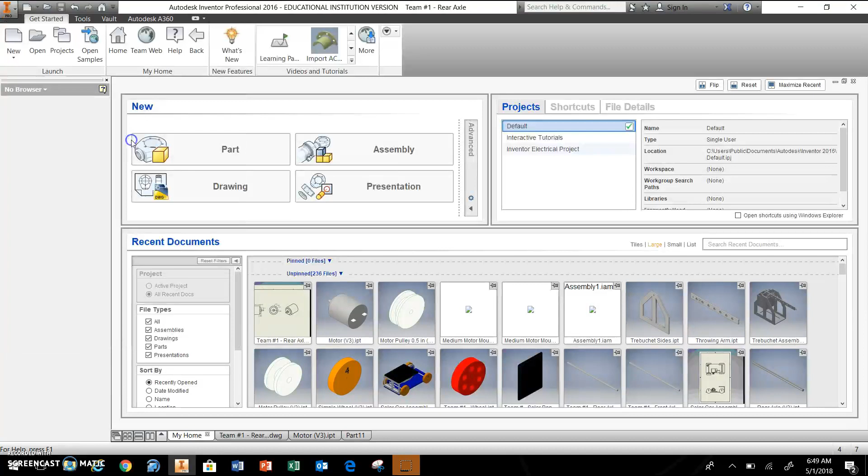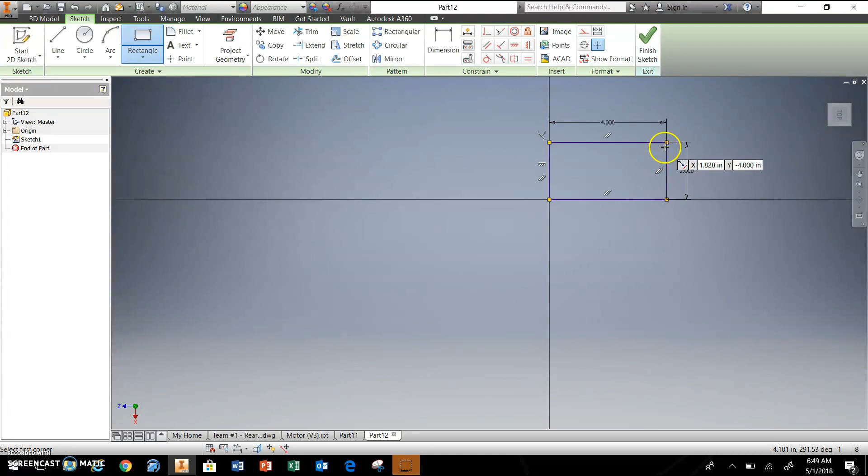You want to do a part, and I'm going to start with the very base of your car, potentially. And if your car's rectangular, you could just use a rectangle. And you can put the dimensions in right here, hit two, whatever it is, and then hit tab and put what the other dimension is. If you ever mess that up, you can just double click and change dimensions. You can also use this dimension tool too. It won't let me do that because I already put that dimension on there.

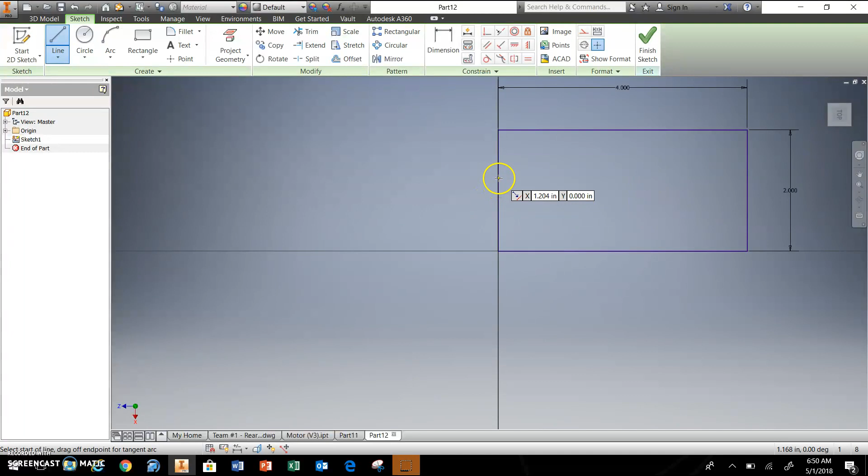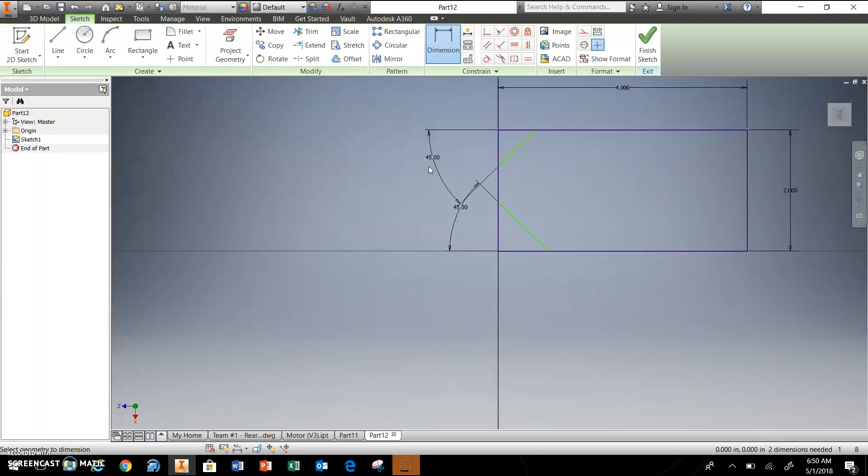If you have a different shape than this, like it's angled, you might want to use this line tool instead to trace it out. So maybe the front of your car is more like this potentially. But you'll want to measure these out and get the right angle on these. So to do angles, you just touch the two lines that it's between. So maybe you know that this is at a 45 and this is at a 45. Okay, and then you would want to do something like how far back is this too?

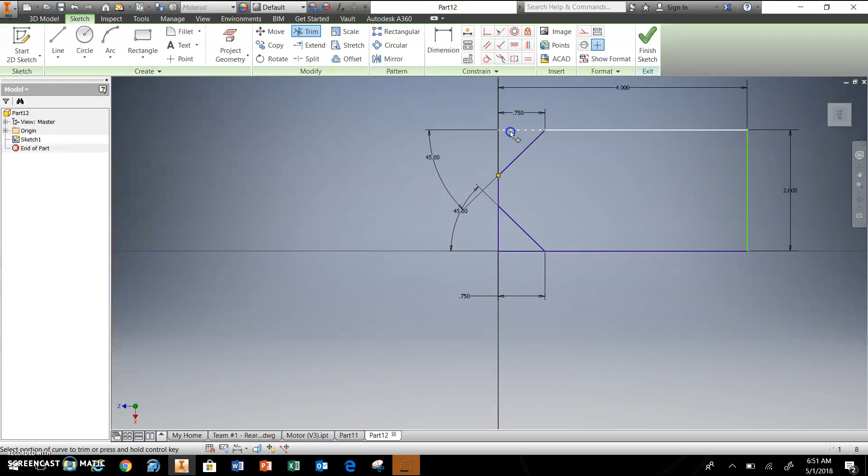So these are just some examples. Your car might not be anything like this. All right, and then you can trim away this. So you might want to do something like that, use the trim tool. So if your car has a weirder shape, just start with the line tool and trace out the shape, but make sure you're dimensioning things.

Any cutouts that you want to do, it's easiest if you do them right here, right now. You can go back and do those later, but almost everybody's going to have a slot for the motor mount to slide on. This, you definitely want it to be about 0.15. That is something you do want to copy right now. How far it is from the outside of the car, you need to measure that on your drawing. That's critical to get that right so that your motor pulley lines up well with the pulley on the rear axle, or front axle if you're doing front wheel drive.

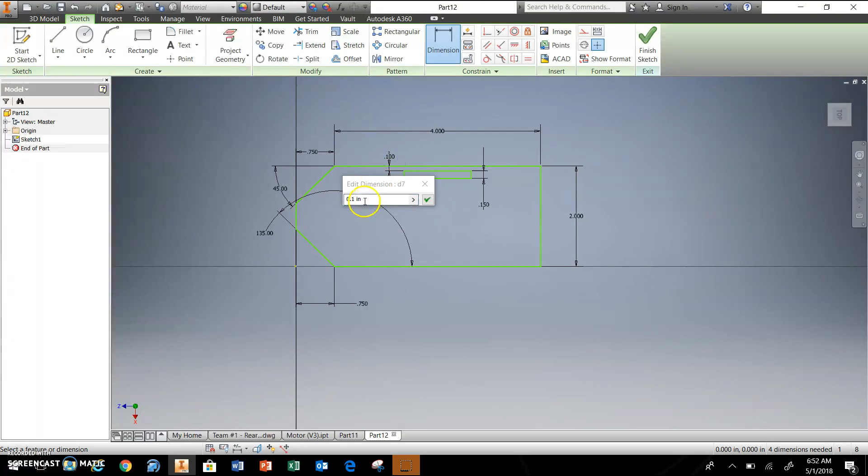So you might need to change this number. That looks probably way too close. Don't use 0.25 because I don't know if that's right. And then you also want to figure out the length of it too, however long you want to make it. Any other cuts that you want to make in here, it's best if you do it right at this time. It's easiest.

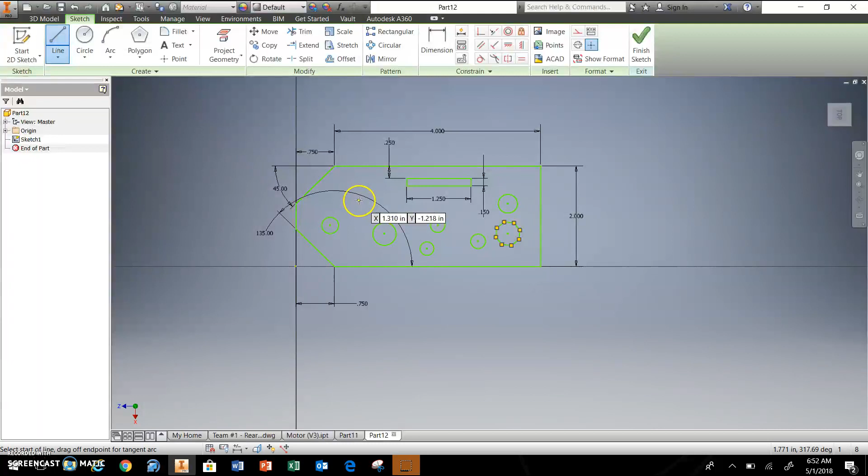Maybe you got a polka dot pattern kind of thing going on. I don't know, it's up to you. Maybe you want to do some polygon, for instance. That's kind of fun to do. And you can put how many sides the polygon is. So you can do an octagon. You could trace out whatever shape you wanted to put on here if you want to do something weird. So it's best if you do that right at this point because it ends up being less extrusions. It ends up being just one instead of having to do a bunch of cuts.

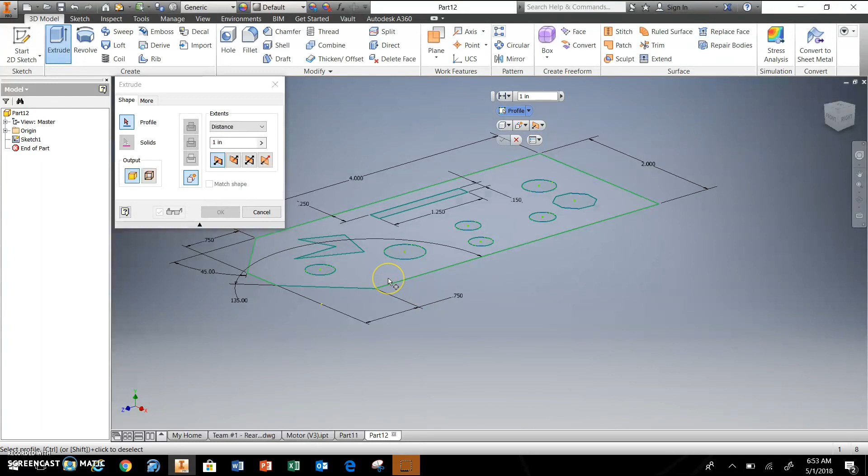Now, when you extrude this, you need to point out what you want to extrude because you have multiple shapes, so the computer doesn't know what you want to extrude. If you're having problems getting it to extrude, you might have an open shape, like where this line didn't meet that line. You can't have an open shape. So the thinnest you can do this is a 1/16. The most you can do it is an 1/8.

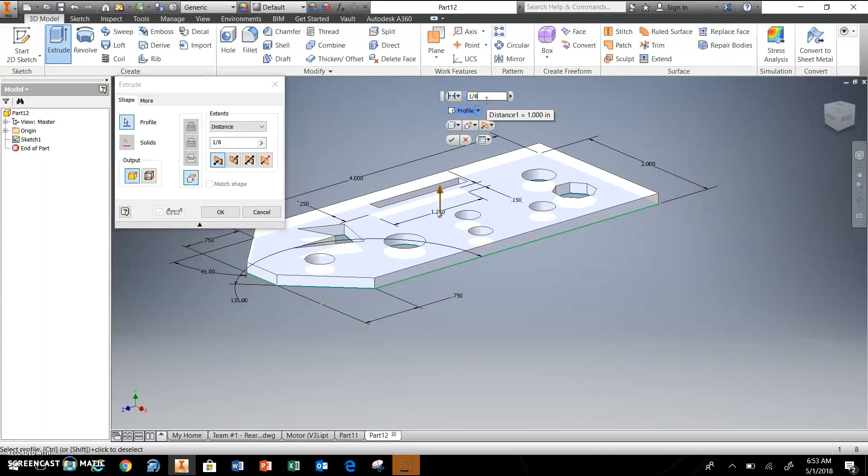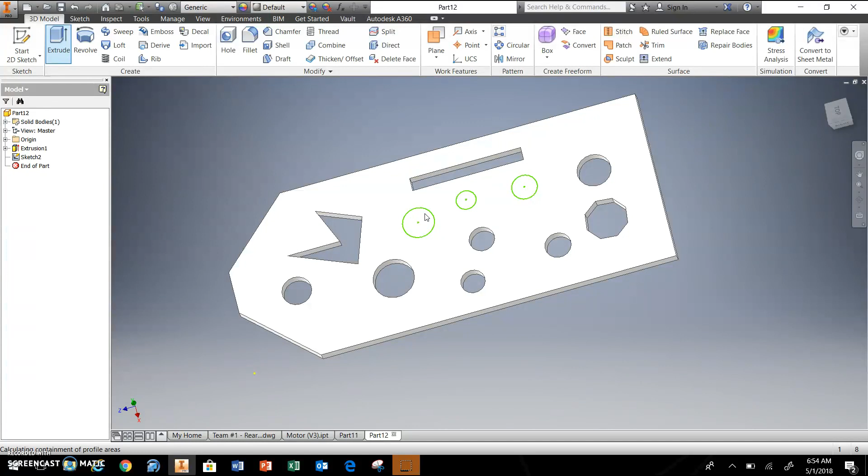Okay. And if you did want to go back and cut something into it at this point, you could go back and do a new sketch, or you could have done this instead of doing all these beforehand. And then remember, you're going to have to choose the shape that you want to extrude since there's multiple shapes. The computer doesn't know which one you want to extrude.

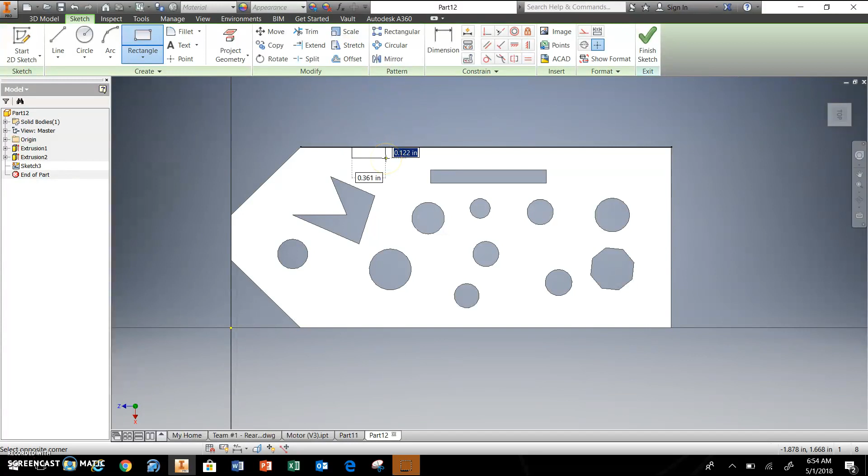Boom. Okay. One thing you guys will all have is the piece that comes up or goes down that your axle is going to go through. Now it's up to you to dimension these. Remember, you can use the dimension tool, you can dimension the thickness. You could have done this as you put them on there or do it after the fact like I did.

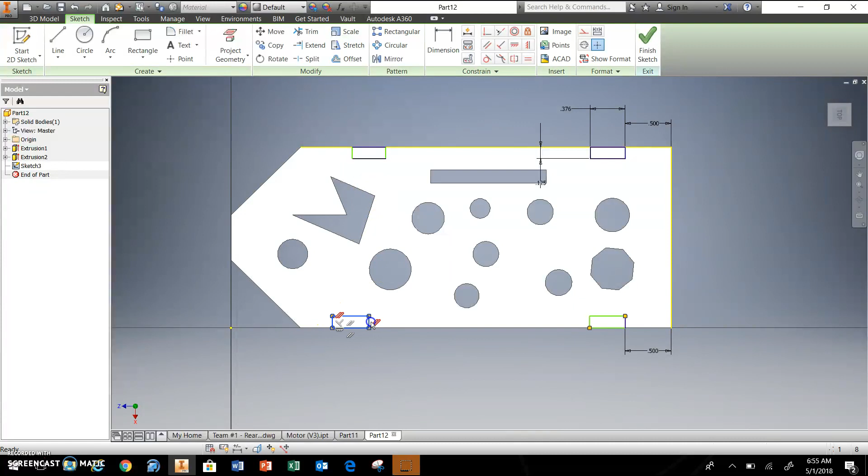You need to do how wide it is. I'm just going to do one of these. And these need to line up with each other. So make sure, for instance, down here when you do this one, everything's the same, and make sure this is definitely the same as that. Otherwise, things won't line up. Okay, can finish that.

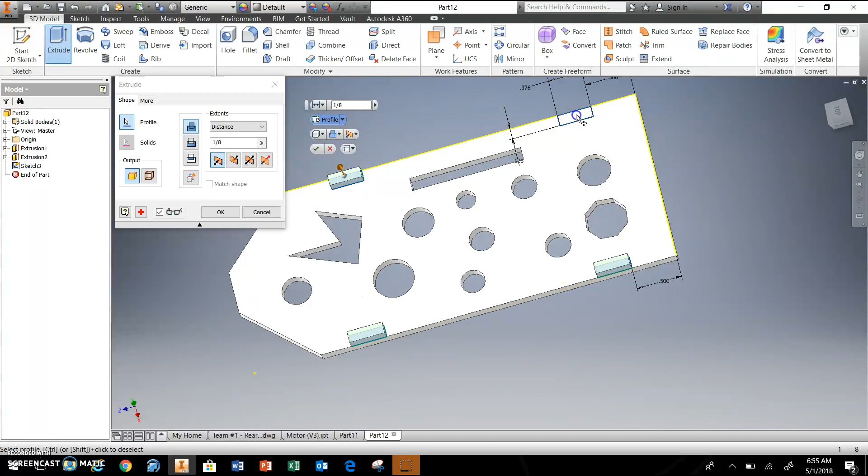Extrude these. So this is what your axle is going to go through, something like this. You could do a different shape than this too. You could also draw it from the side and extrude it inwards too. Yeah, that might be too much. Oh yeah, that's a lot. So don't do that much if I were you, unless that's what your hand sketch has.

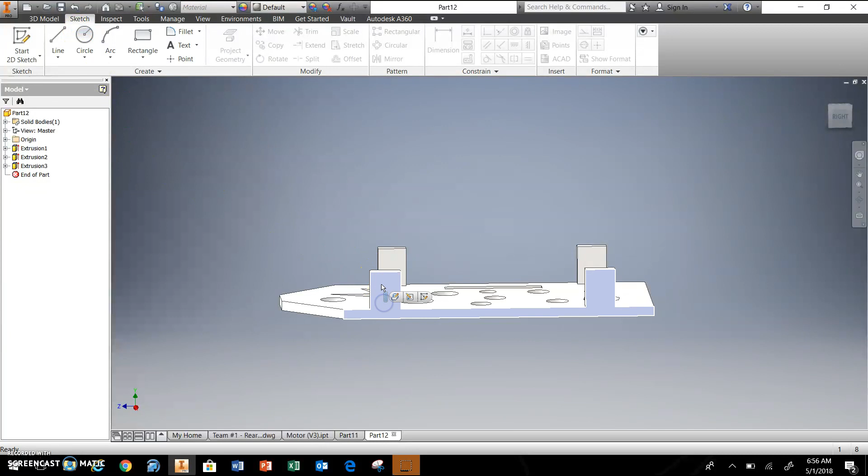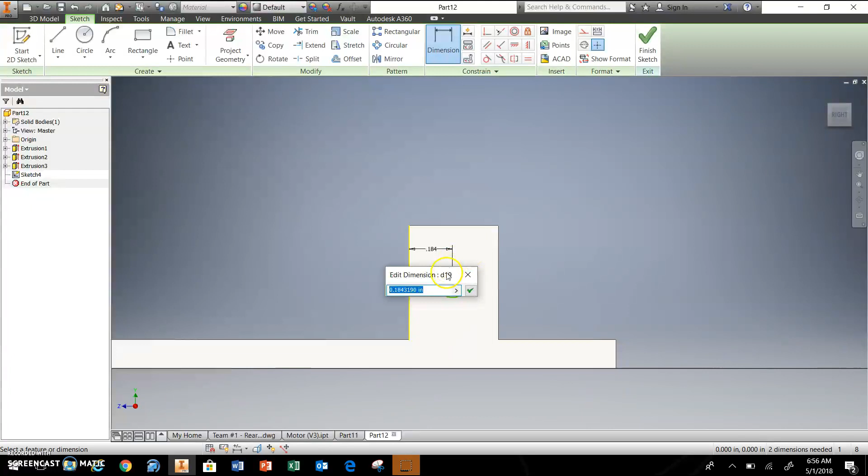And then you need to obviously make a hole for the axle. We could do this on just one side. And then make sure you put this in the center. Nope, didn't like that, huh? So whatever this overall width is, divide it by 2. And then make sure you figure out placement this way too. You would do the same thing on this one as well. I'm just going to show you one of these axle supports.

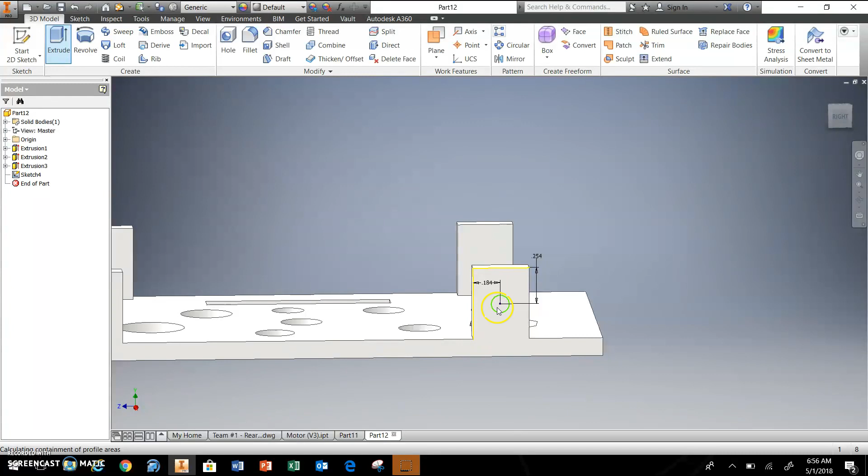And then what you want to do is extrude and do a cut. I don't know why this computer is so slow. A little frustrating. Cut, and then you want to pull it so it goes through both sides. Then you know it definitely lines up. And you'd want to do the same thing here. You probably could do that at the same time actually as you do the other one.

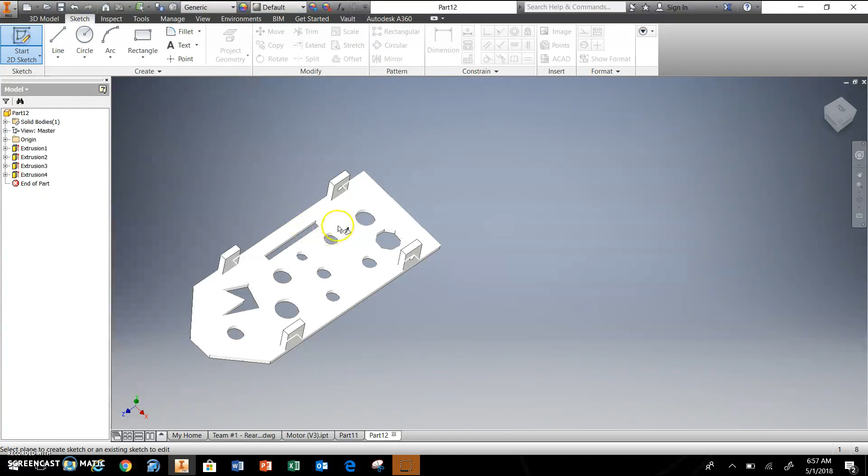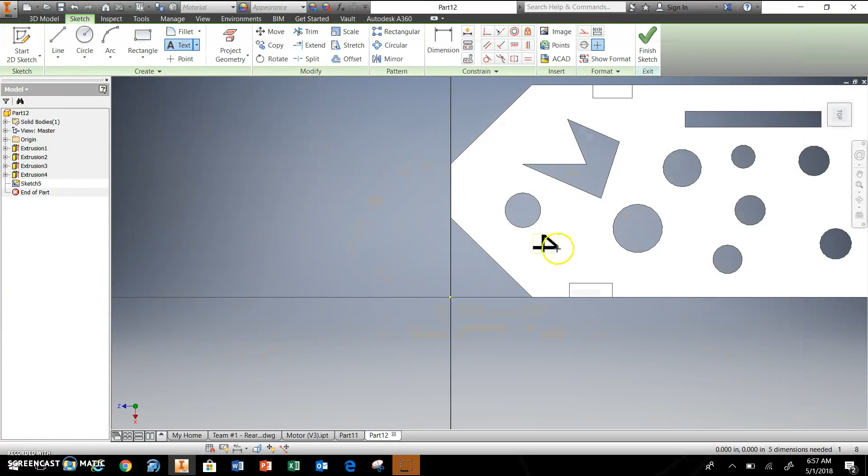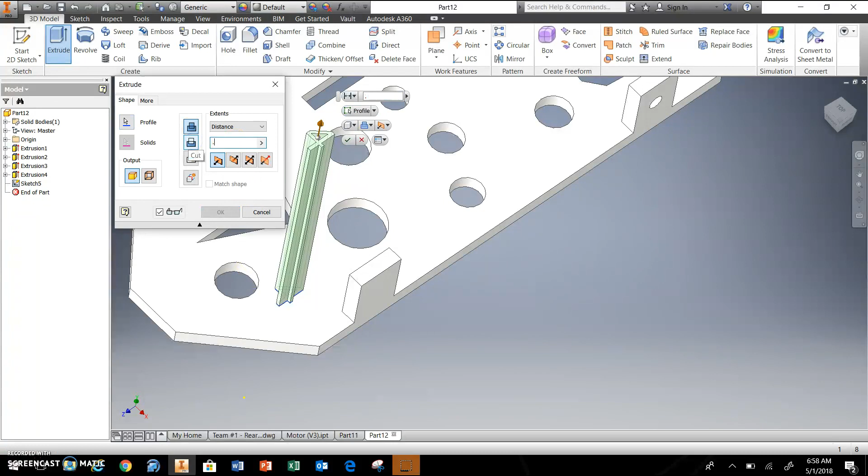You also want to put text on here, your car number somewhere as well. And just like you've done on other parts, it's the same process. You might want to make this bigger so you can see it. And you can either cut it into there or raise it by about 0.02, which normally shows up pretty well. You could raise it more than that if you wanted to, but come on, computer. Also want to color your car in like we always do.

And then once you're done, remember to save this into the H drive. Make sure you're saving it into your folder that you created specifically for the solar car, and make sure you're putting your team number on there like always, and a good description. A good description means like chassis, for instance, or car body. Up to you, but it should make sense. Don't put random things here.